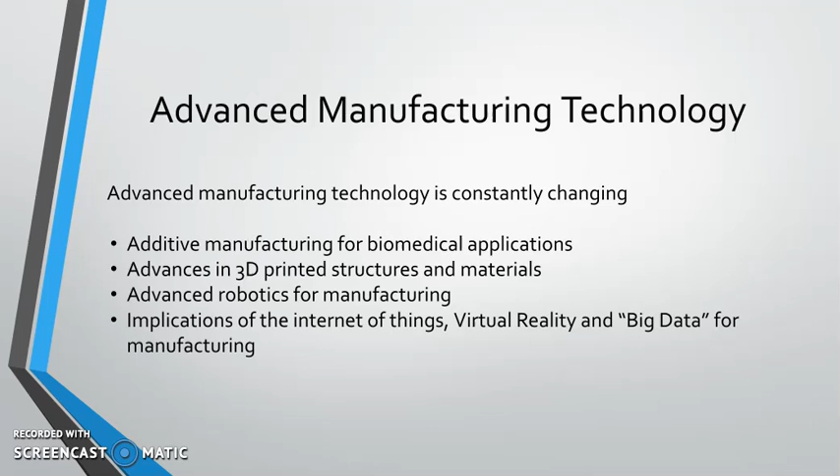Today we will give more insight into 3D printed structures and materials. In today's presentation, we'll provide a state-of-the-art review of 3D printing, and then we'll move into the future of 3D printing within 5 to 10 years and how it will impact the industry.

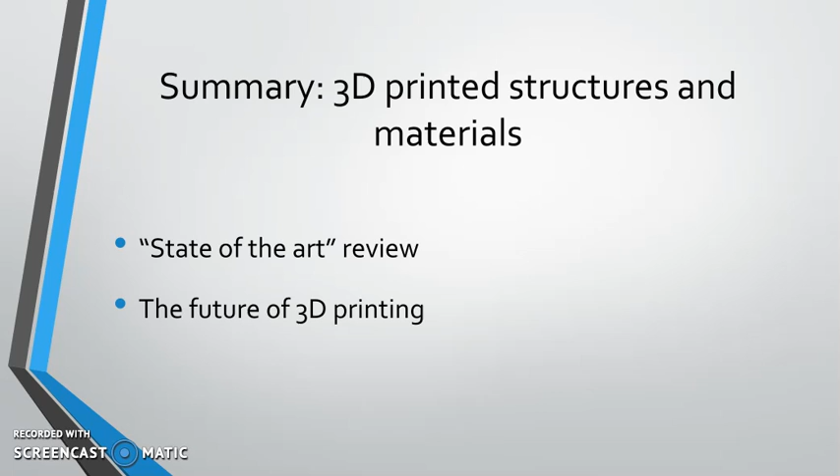3D printing, or additive manufacturing, is a process of making three-dimensional solid objects from a digital file. In the additive process, an object is created by laying down successive layers of material until the object is created. Each of these layers can be seen as a thinly sliced horizontal cross-section of the eventual object.

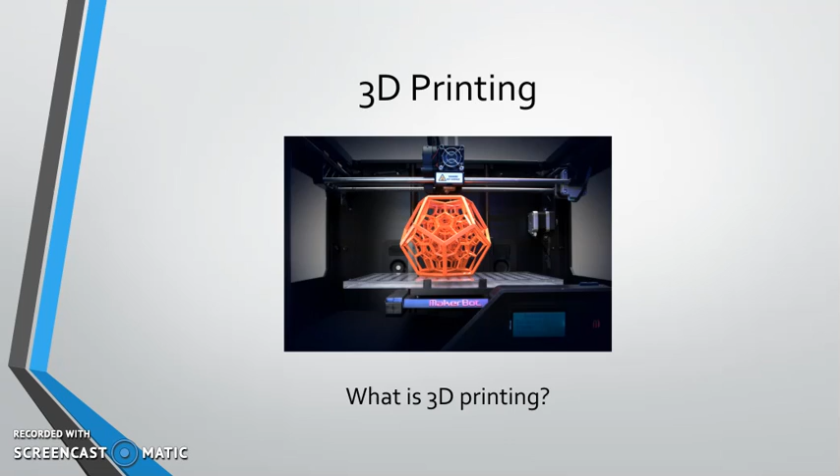A long time ago, 3D printing was only thought of as theoretical. However, 3D printing is now reality. Within recent years, 3D printers have become much cheaper to produce and buy, and many models are now available for purchase, as well as many designs for products. It becomes clear why 3D printing is now a reality when comparing it to traditional manufacturing, looking at their materials and structures, and at the most commonly used 3D printers.

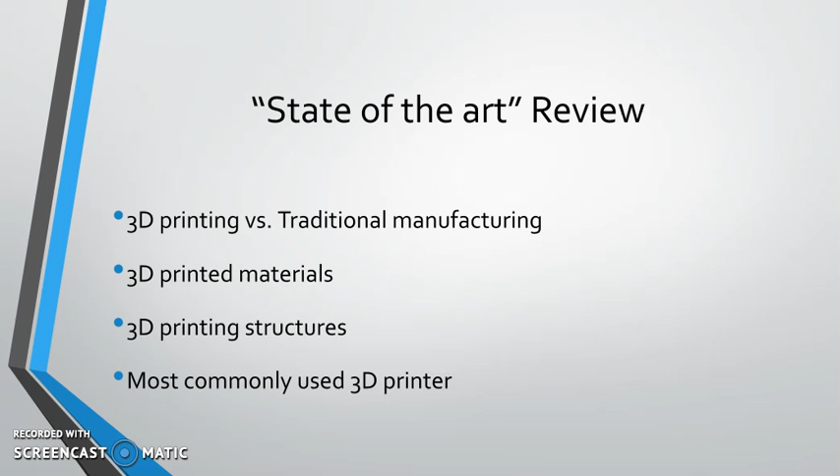3D printing versus traditional manufacturing. One of the biggest advantages 3D printing has over traditional manufacturing is that it generally does not require further processes or special tooling to make a part. In making a prototype, this reduces the completion time, cost, and effort that would normally be spent setting up an assembly process if a traditional process was used.

Another key advantage of 3D printing over many traditional processes is the huge difference in waste prevention. 3D printers are incredibly resource efficient. Only material that passes through the extruder of the printer is consumed. However, traditional processes such as injection molds require extra materials to fill the mold.

On the other hand, 3D printing does not beat out traditional manufacturing in every category. When dealing with large-scale production, past the prototyping phase, the additive manufacturing process is less efficient than traditional ways of making parts. Working at large scale, assembling the objects would take extremely long compared to a traditional production line. Overall, 3D printing will likely not completely replace traditional manufacturing. However, this process does display an incredible option for one-off production runs and small custom work pieces.

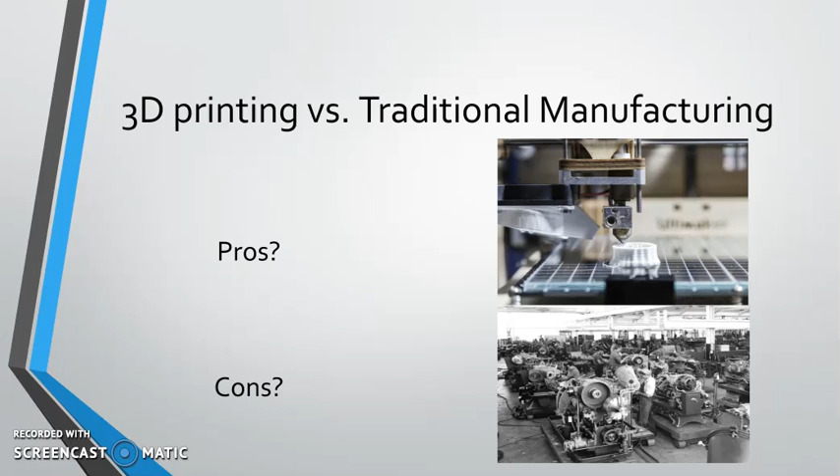Within 3D printing, there are many materials that can be used to fabricate a chosen part. With different 3D printers, different types of materials can be used, such as polymers, metals, and ceramics. The most commonly used materials are nylon or polyamide, commonly used in powder form undergoing the sintering process, or in filament form with the FDM process. This plastic is a strong, durable, and flexible material.

PLA is a biodegradable plastic material that can be used in resin format for DLP processes or filament form in FDM processes. This material comes in a variety of colors and can also be transparent, which has proven useful for some applications of 3D printing.

Gold and silver are two strong metals which allow the printed object to be made from wax and then casted in a later stage. Lastly, ceramics used in 3D printing are very rigid, delicate, and typically white. Within the printing process, the ceramic is first printed and then the surface is glazed.

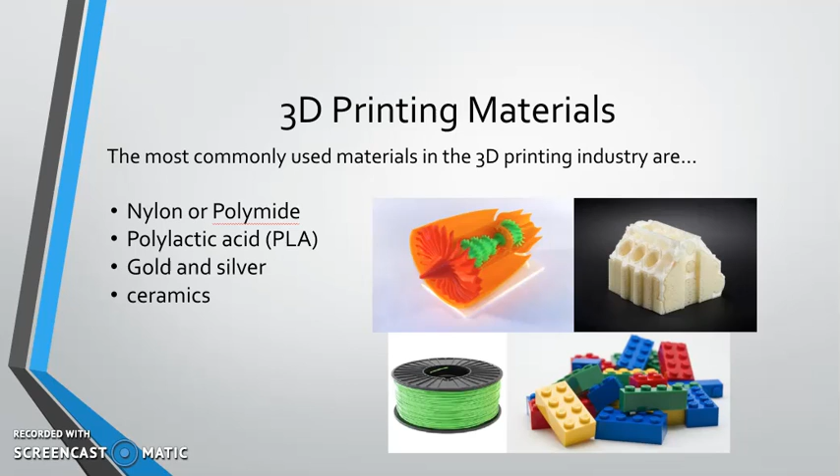Structures can make our lives much easier by creating prostheses and other objects used in projects aimed at preserving the environment. Common and useful objects that can be 3D printed include food. 3D printed technology can now achieve the production of food, using different raw materials, with many foods made into liquid or puree form.

Another structure is parts and pieces. These prototypes are very important in the design process and allow necessary design flaws to be seen and corrected. Examples of 3D printed prototypes include gears, engines, simple electronic components, etc.

Next, 3D printed organs and human tissues can be used in the field of medicine, especially when used to create personalized biomedical implants through 3D bioprinting. Lastly, the environment: coral that is in danger of disappearing can now be preserved and the ecosystem can be revitalized so that it can be as it was before.

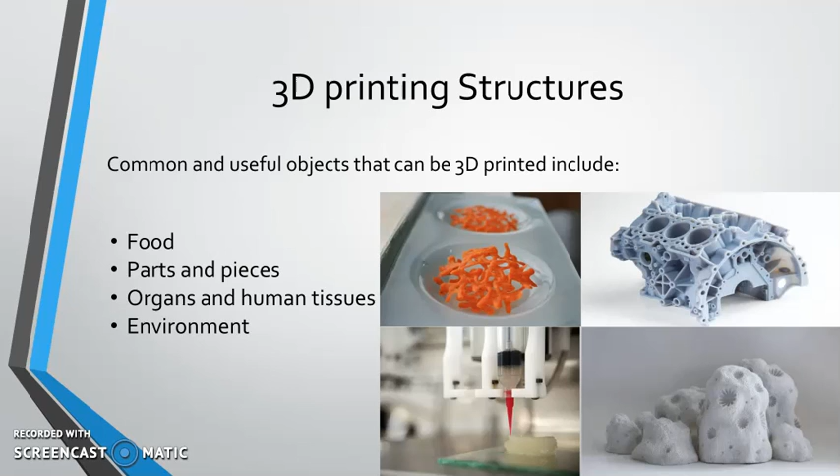These new reefs have more complex structures and last much longer than natural reefs. Therefore, the ecosystem will be maintained and regenerated without any recurring problems over time.

There are many different methods of 3D printing. The method used most often is a process called fused deposition modeling. FDM can often be used in homes and can make 3D printing a fun and easy hobby.

The material used in FDM is a thermoplastic filament, which is first heated to its melting point and then extruded layer by layer until a 3D printed object is created. Also, a support material is used which supports the object as it is being printed.

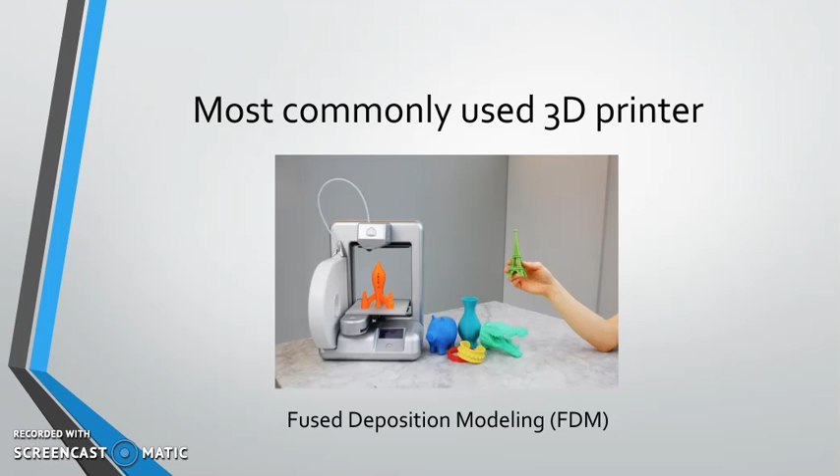3D printing in the next decade is estimated to grow dramatically. Skeptics in the past have argued that 3D printing won't be able to compete with the efficiency of mass production, but throughout its progression in recent years and due to the estimated progression to come with its technology, that claim is becoming less and less factual.

Its increasing ability to print a larger variety of materials, as well as print more parts in a smaller time period, suggests that it will be very useful to many industries, such as the automotive and aerospace industry, as well as the biomedical industry.

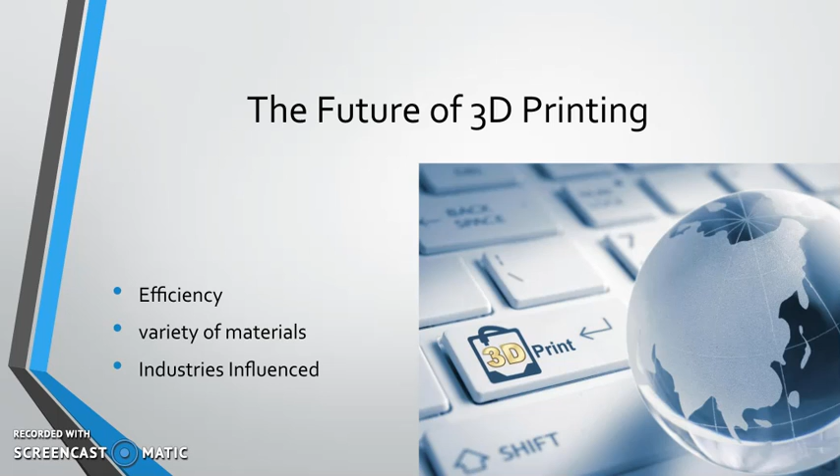For metals, in the past there have been complications with 3D printing metal components due to the forming of pockets of gas in the laminated layering of materials. This is considered a large issue because gas pockets within structures compromise its ability to withstand fractures and fatigue.

Coming up with a method of 3D printing for alloy metals is one of the main areas of research for its future development. Another one of the main issues with printing metals is that it's very expensive.

The high cost of printing is due to the expensive high-quality metal powders which must be used for the process, as well as the expensive printers themselves, as no traditional 3D printer is capable of printing metal due to the high heat required to melt the metal.

The main difficulty faced with 3D printing composites is that the powder material used for printing results in a limited fiber length and therefore compromises the properties of the structures for which it is used to make.

Currently, research is being done to employ a method of 3D printing composite parts in order to achieve extended fiber lengths and therefore not hinder the structural properties of composite parts made through 3D printing.

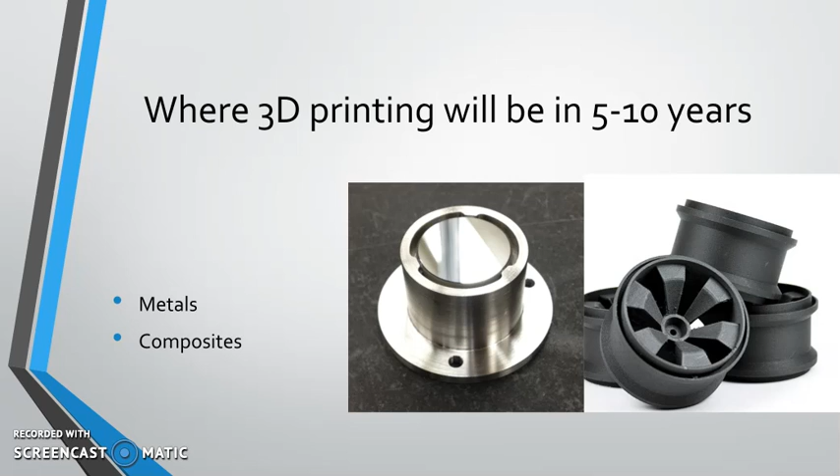It's likely that within the next decade, it will be possible to 3D print more components with larger fiber lengths, and therefore a larger variety of composite 3D printed parts.

For metals and composites, advances in 3D printing materials are expected to have a huge impact on the aerospace, automotive, and biomedical industries due to the ability to make very complicated shapes with minimal waste of materials as opposed to traditional manufacturing. Enabling manufacturers to produce metal and composite parts through the process of 3D printing would enable them to make changes to their products simply by modifying the computer model being used to produce the part.

This would reduce huge costs due to the fact that engineers would no longer need to modify an entire production process to modify a part being produced.

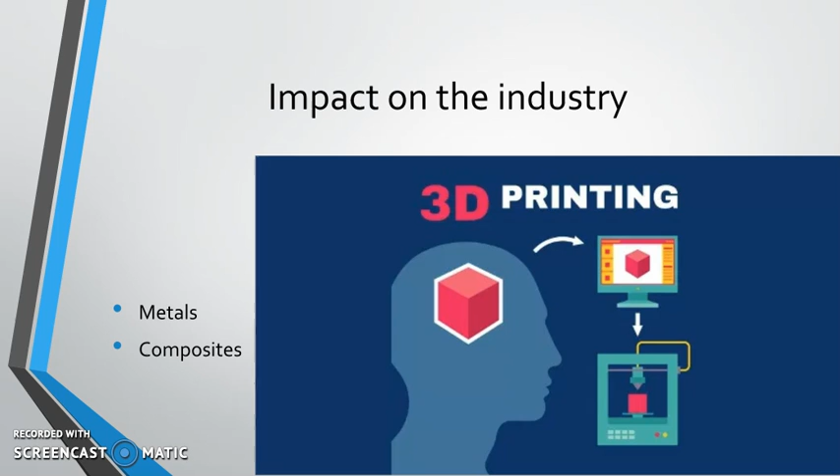In addition, 3D printing of composite and metal will result in the ability to make strong, intricate parts much lighter than ever before. For automotive and aerospace industries, this will mean that vehicles will be much lighter and will therefore require less fuel.

In conclusion, 3D printing is a constantly changing process. As new printing models and materials become available, 3D printing will grow further into a common and efficient part-making device.